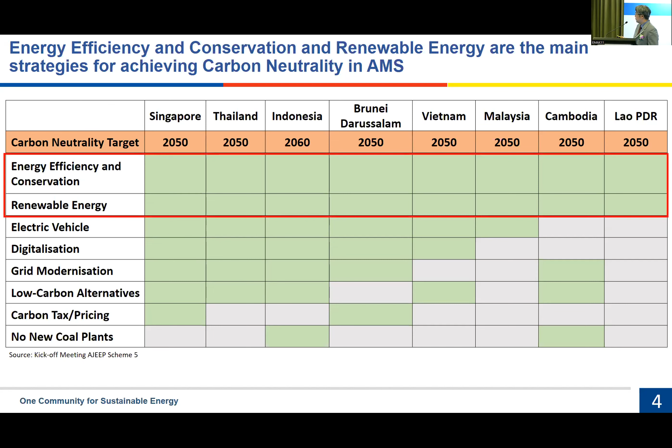Our member states, we call them ASEAN member states, have set up energy efficiency and conservation related strategies. The individual energy efficiency targets and action plans from each member state would support pursuing the aspirational goal of reducing regional energy intensity in 2025.

The member states have specified energy efficiency targets for their own countries based on energy saving, energy intensity, or energy consumption. And the establishment of national level targets implies that each member state is committed to increasing energy efficiency in the region. Across member states, each country has created a dedicated timeline and also demarcated its national area of focus.

The mandatory energy management system is a common policy for the application of EE&C practices, and it requires energy-intensive establishments to implement EMS in their respective energy efficiency law, act, and decree. The threshold values and units vary among the member states, and all countries include commercial buildings within the scope of coverage. Malaysia and Cambodia only cover electrical systems, for example. Energy management is therefore a critical strategy to enhance efficient and low carbon buildings. Ultimately, it will contribute to the whole carbon neutrality goals.

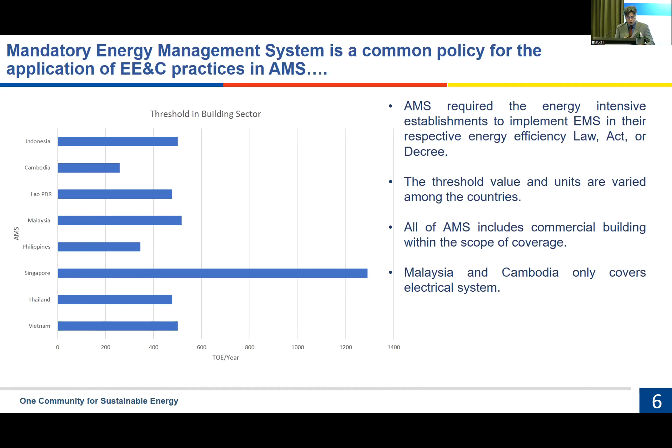If you look at this table, commercial demand is expected to increase 4-fold in 2050 compared to 2020 levels, which are at 29 million tons of oil equivalent. And the commercial sector is highly electrified, with an electricity share of 65% of the energy requirements. Hence, it could benefit most from efficient lighting and, of course, cooling. However, it also consumes biomass and LPG for heating and cooking, and diesel for power generation, and therefore policies on increasing electrification are also recommended.

Although it varies from country to country, the cumulative contributions of office, hospital, retail, hotel, and other commercial spaces are almost equal across the entire region. Energy intensity reduction in any of these facilities could provide significant improvement to the whole sector.

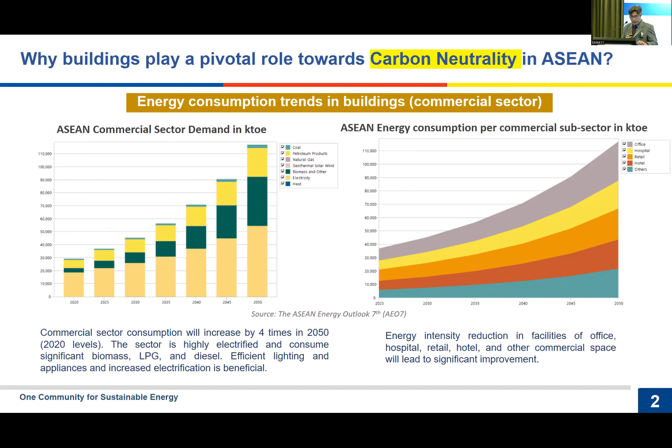Residential sector energy consumption is expected to increase 1.5 times in 2050. The sector is mainly electrified and consumes a large share of biomass for heating and cooking. Efficient lighting and appliances policies, increased electrification and clean cooking are therefore very crucial. MEPS and labeling were seen as effective policies in several member states that could be adopted by the region as a whole.

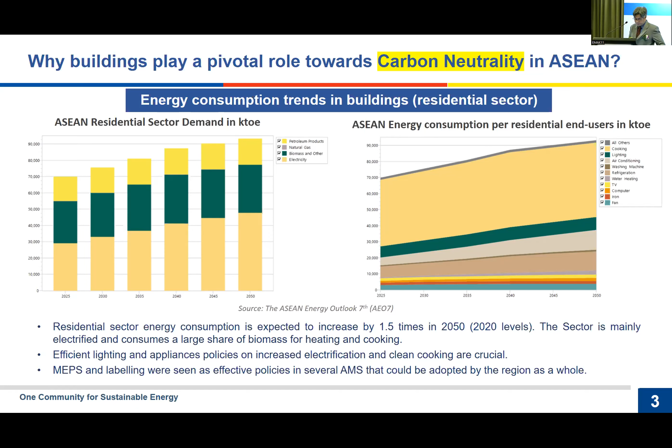We do have this very interesting and very straightforward activity. We call it the ASEAN Plan of Action for Energy Cooperation, or APAEC in short, phase 2. Right now we have 2021 to 2025. The set goal for this APAEC is to achieve an energy intensity reduction target of 32% by 2025 based on 2005 levels. And in APAEC phase 2, buildings are considered a key sector to support the transition alongside the goal to achieve the RE share of 23% in total primary energy and also RE share of 35% in total installed power capacity.

To meet the goals of APAEC phase 2, the buildings sector will need to become highly energy efficient and use primarily zero carbon energy sources. In 2020 alone, buildings accounted for 23% of total final energy consumption in ASEAN, with 17% and 6% for residential and service buildings respectively, and for 27% of total energy and process-related direct and indirect carbon dioxide emissions that amounted up to 0.4 gigatons of carbon dioxide.

And also the urbanization rate is expected to increase from 50% in 2018 to 60% by 2040, adding 120 million urban dwellers, increasing floor area by 60%. So it's quite a large number. And ASEAN building energy consumption is expected to grow by around 60% in 2030 and by 120% in 2040, while energy efficiency measures could help to mitigate this growth by at least 20%.

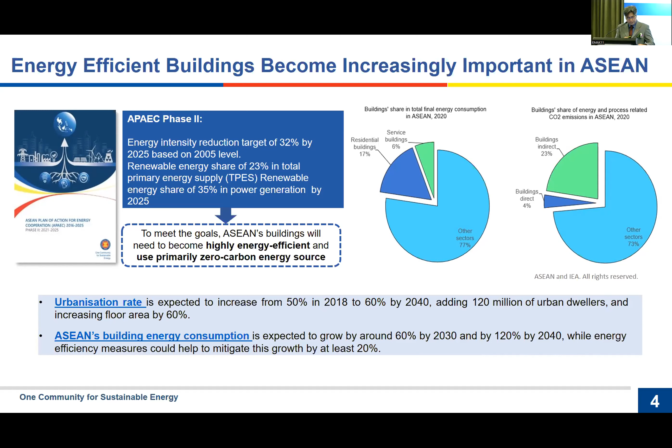A joint collaboration of the International Energy Agency, ACE and the EE&C SSN subsector network covering 10 member states in Southeast Asia. The project aims to develop a detailed roadmap for the buildings and construction sectors and a roadmap for space cooling in the ASEAN region to help reduce energy demand in the sectors and improve stakeholder collaboration.

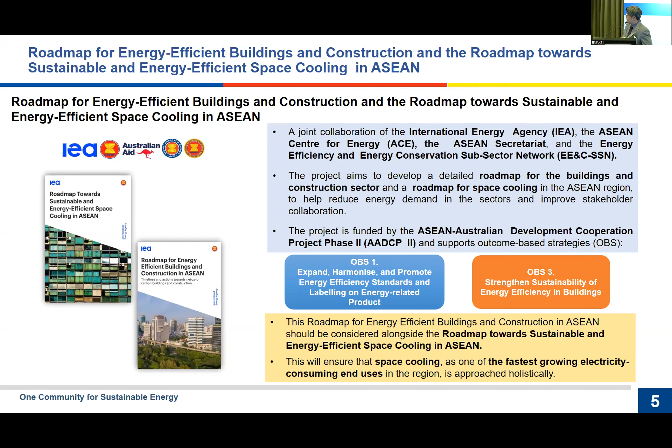In the APAEC phase 2 that we have, buildings are considered a key sector to support the transition alongside RE, of course. And our report shows a lot of activities under this ASEAN Plan of Action for Energy Cooperation. This roadmap for energy efficient building and construction in ASEAN identifies timelines, milestones, actions and activities across 7 action areas. Each of these areas provides a structure that includes a vision as well as options for action and activities to support the transition to net zero carbon building and construction.

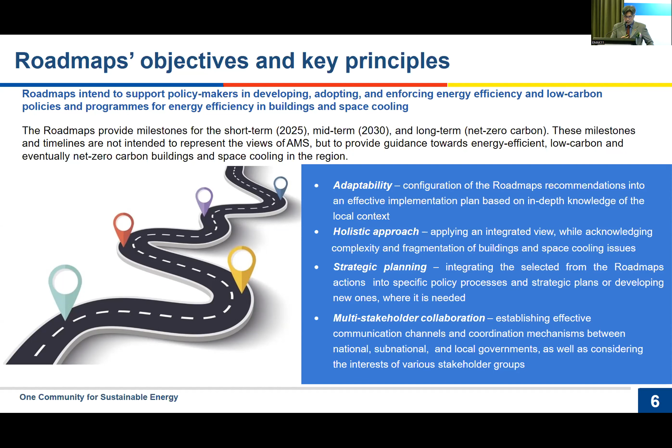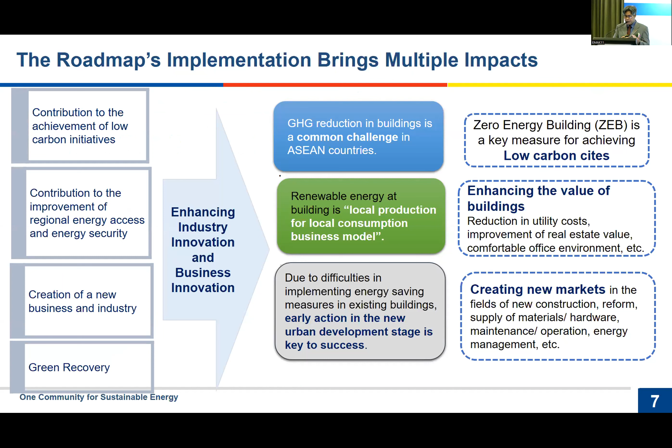The roadmap implementation will result in multiple benefits. Improving energy efficiency and decarbonization of buildings offers a number of economic, social, and environmental benefits beyond energy savings and emission reduction, including contribution to low carbon initiatives, improving energy security, and of course, creation of new business and industry and green recovery. The roadmap outlines key recommendations across 7 action areas that constitute a possible policy package to support transition towards more energy efficient and low carbon buildings.

An effective policy package covers all 7 action areas described above and includes a combination of regulation, incentives, and information policy instruments, combining a push, lift, and pull approach. Regulation pushes energy efficiency across the market. Once regulatory policies are in place, their effective implementation and enforcement could be supported, lifted by information policy instruments and incentives to ensure compliance and further progress. The incentives provide a pull to shift the market towards high efficiency.

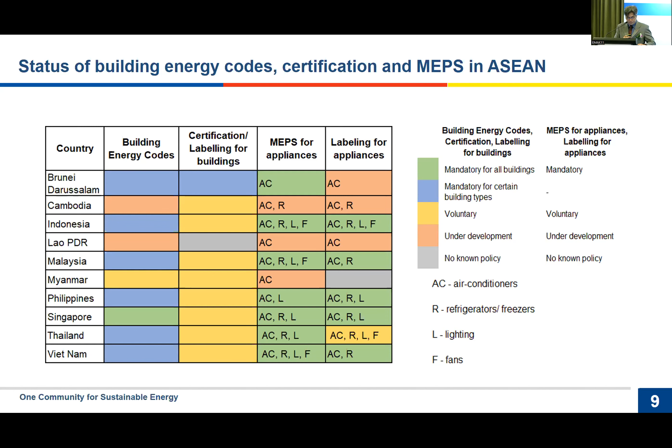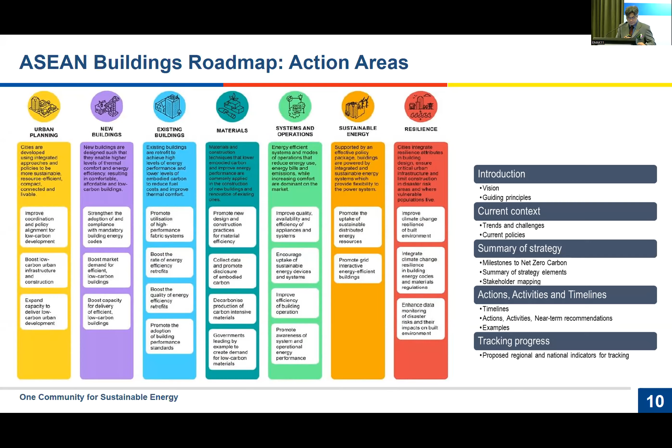The ASEAN Building Roadmap from IEA is guiding the development of the NZC target from all perspectives around the building aspect: urban planning, where buildings are mostly found, new and existing buildings, materials and construction techniques, including systems and operation, low-hanging fruit, as I mentioned previously, sustainable energy, grid-interactive buildings, and of course, the resiliency of the building itself. The figures summarize the key milestones of the proposed ASEAN Building Roadmap towards net zero buildings. The roadmap also provides a range of policy measures available to support net zero carbon, efficient and resilient buildings and construction in the region, providing a baseline of their current status and future goals for the region.